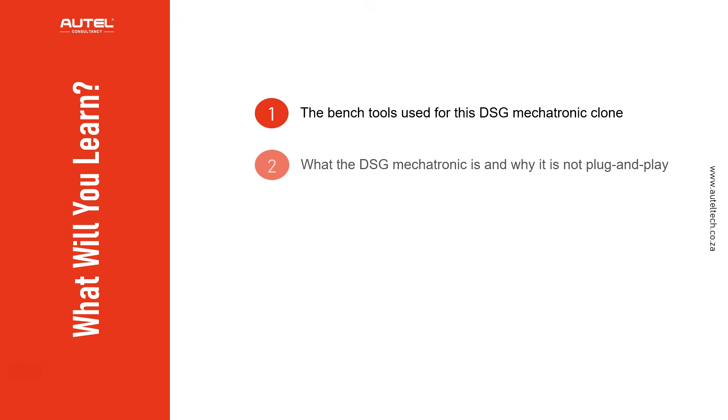Alright, so this is what we're going to be learning today: the bench tool used for this DSG Mechatronic clone procedure, what the DSG Mechatronic is and why it's not a plug and play, how to judge a donor unit when the year or trim is different, how to separate the original source files from the donor backup files, and lastly how to clone a 2012 Volkswagen CC TCM with the Autel IM608 Pro.

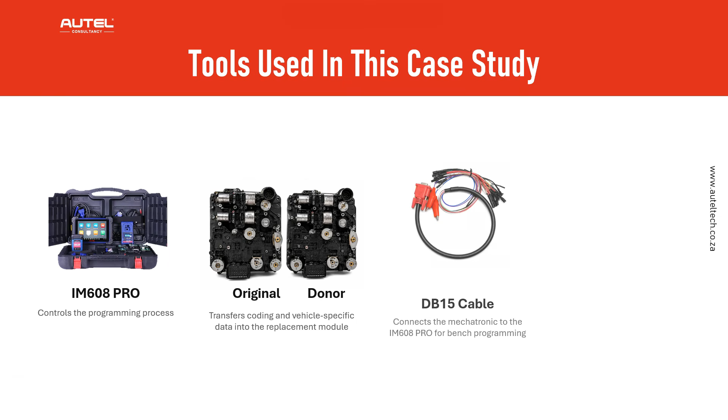The tools used in this case study are the following: the IM608 Pro, the original TCM and the donor TCM, your DB15 cable, and the G-Box 3.

To give you background on this case study, the client reached out to me about a 2012 Volkswagen CC R-Line that needed a new Mechatronic. He said the used Mechatronic came from another 2013 Volkswagen CC, but the vehicle had a different year and trim. So the problem was this could not be treated like a simple part swap.

Even if the Mechatronic physically fits, the module data, the transmission family, the part number, and the software path still have to line up. So before moving forward, the client wanted guidance on whether the used unit could be cloned with the Autel IM608 Pro.

So what is the Mechatronic? The Mechatronic is like the control center inside the transmission. It combines the hydraulic control unit with the electronic transmission control module, and this means it's responsible for clutch control, gear selection, hydraulic pressure, and communication with the vehicle.

So in our case, we're not just swapping a mechanical valve body. We're dealing with a program control unit that has to match the vehicle electronically.

Now, when the client came to me, the first thing I always tell people is when you're dealing with European vehicles, the part numbers need to match. And when he told me it was from a 2013 Volkswagen and we're dealing with a 2012, we might have some headaches down the road.

If you don't know, when you're dealing with European vehicles, anytime you put on used modules, they need to be the same part number. I can't stress that enough. If there is a variation, you're going to have issues. You're going to waste a lot of time on subscriptions and people's money.

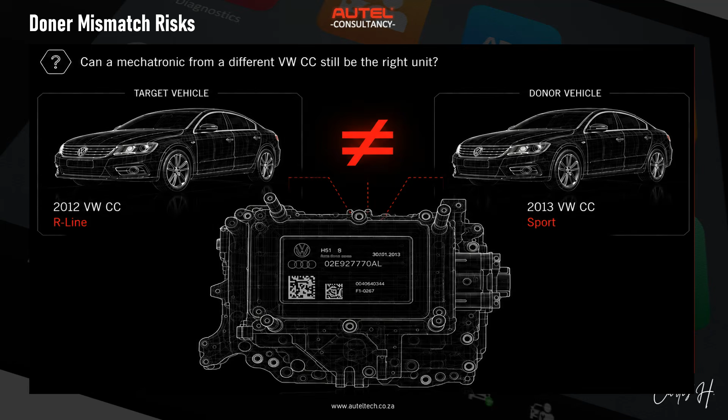So what I did was I said, look, go back and have the owner give me a picture of both Mechatronics, and we can confirm if it's the same. And that's what we did. You can see on the target vehicle, the part number is exactly the same as the donor. So with this, I said, okay, since we have the same part number, it's safe to go to the next step, which is the clone.

And this is going to be the workflow that we're going to be using. Step number one, we're going to take it on the bench. We're going to read the flash, the internal EEPROM, and the external EEPROM. Then we're going to save all of those and label them as original files onto your IM608.

Then we're going to put the donor one on the bench. We're going to back up the donor TCM and do the same sequence: read the flash, the internal EEPROM, the external EEPROM.

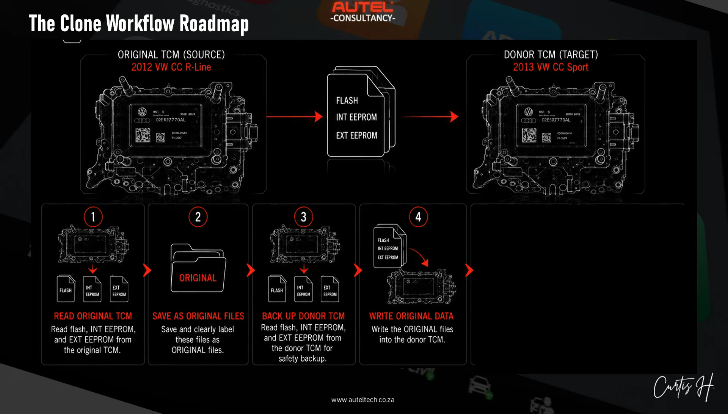And then we're going to write the original files that we saved onto the donor TCM. Then we're going to install it on the vehicle and scan for any error codes or do any necessary adaptations. Okay, so this is the workflow.

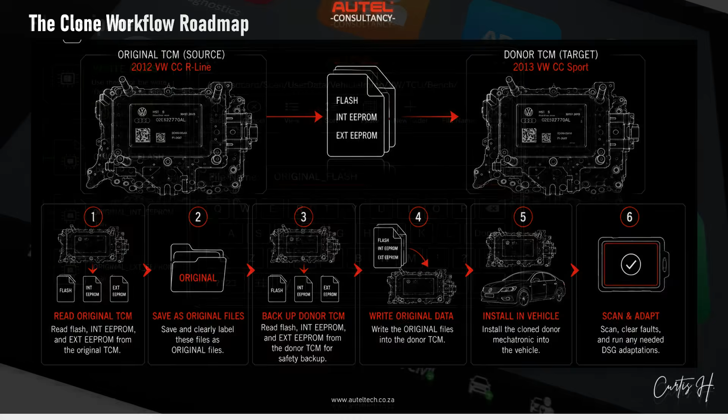One thing that's very important when you're doing these bench programming procedures is to have some sort of file naming convention where you can identify the files, because we don't want you to write to the incorrect file. I'm going to show this to you in the video, but you guys need to create some systematic way to label these things when you're saving these bin files.

Step number one, confirm the TCM and the bench wiring setup. We're on the bench now, and we're going to go ahead and ID the vehicle. Just going to fast forward this up a little bit, you guys. There's a European one.

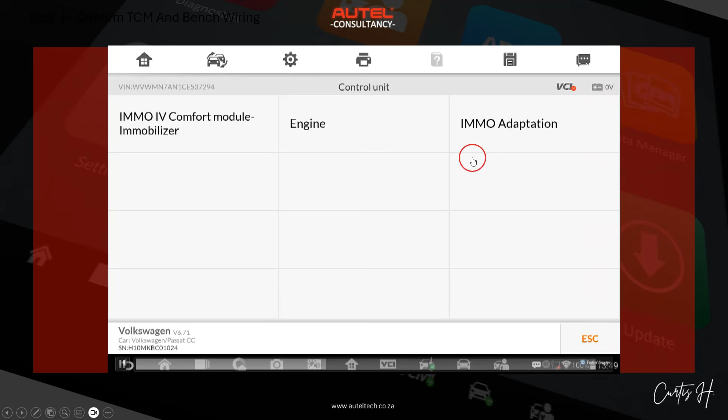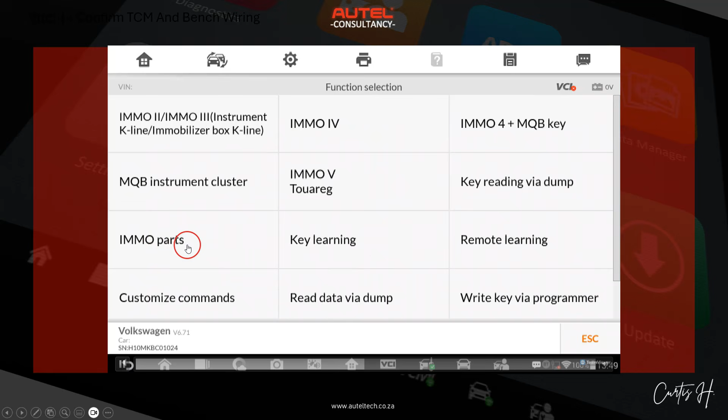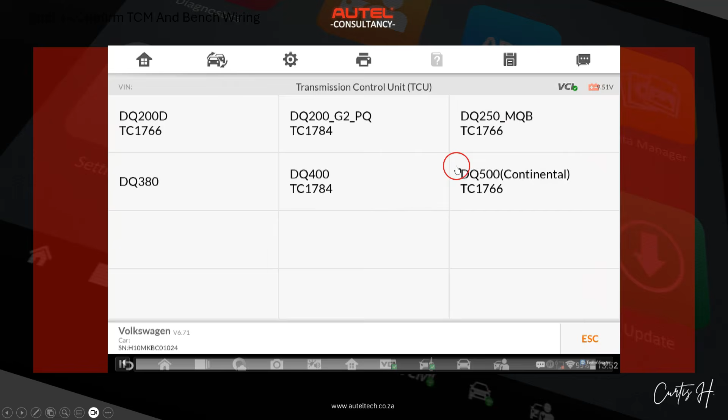Then we're going to go to control unit, and then to IMMO adaptation, if I can recall correctly. Here it's going to revert us back to expert mode, so click expert selection. From here we're going to go to IMMO parts. Once we click that, we're going to locate the transmission control unit on the top right, and then select, in our case, the DQ250. This was on the Mechatronic, so whatever one you're working on, you'll select accordingly.

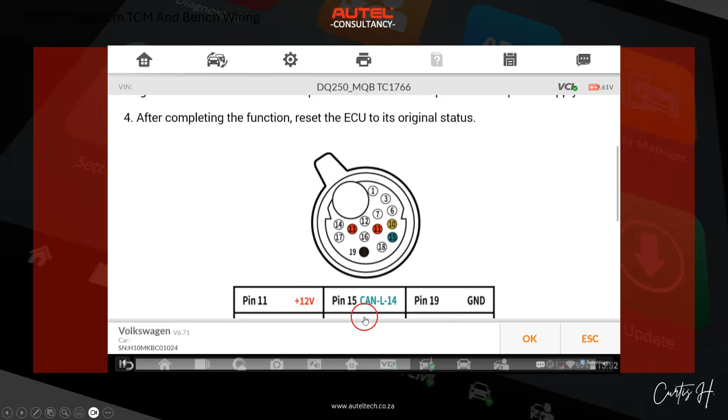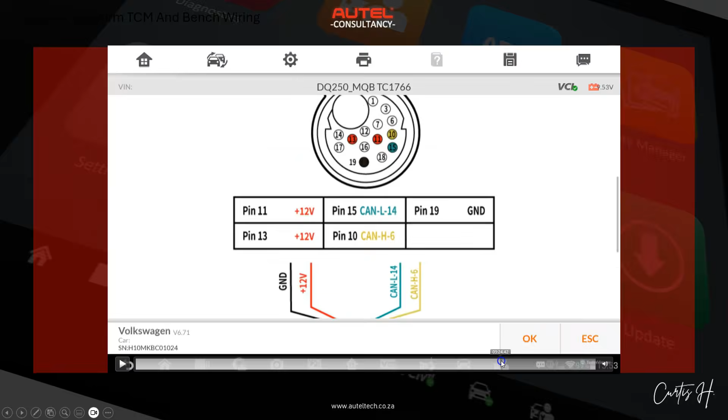Here it's giving us the procedure. What we're going to be using is the DB15 cable, connected to your G-box. We have your power source, and you just look at the diagram—this is what my client was doing at this moment. He was connecting everything up according to the diagram, your ground, your powers, and once that's done we can go on to the next step, which is to read and save the original data.

Once he's connected, we're going to go ahead and click escape, and then you can see here we're going to read the flash data. That's the first step. It's going to take a moment to communicate, but once it communicates you're going to start to see the progress bar of reading the flash data. We're going to let this go all the way up to 100%.

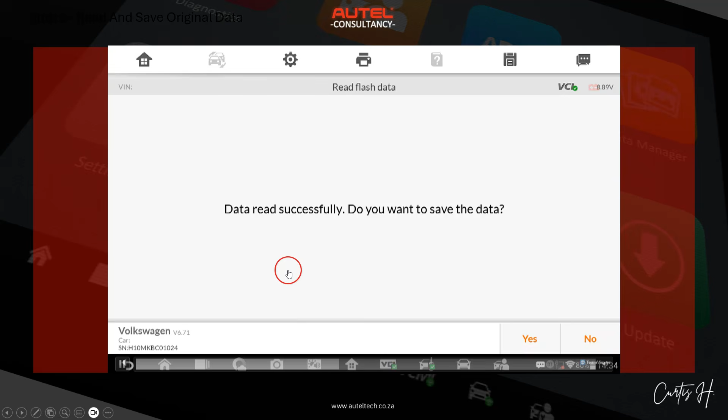It's going to ask us, do you want to save the data? We're going to go ahead and click yes. What I'm doing here is deleting the default label that the Autel made, and relabeling it with my naming convention. Once I paste it, I have 'original,' and at the end it says 'flash.' I'm going to go ahead and save that to the system, and move to the next sequence, which is the middle one right here, read internal EEPROM.

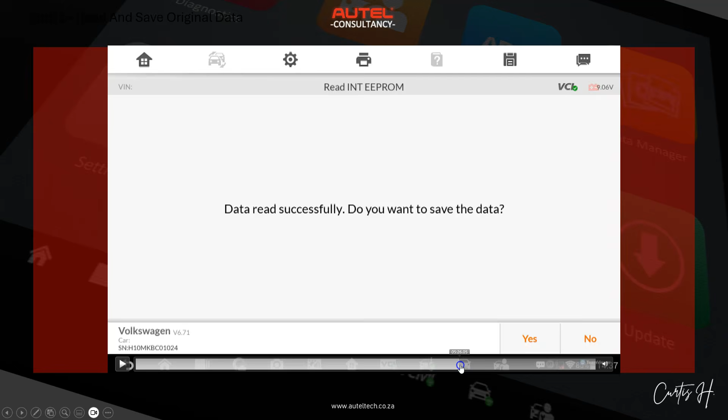Once I read the internal EEPROM, we're going to keep following the same process—you're going to get the progress bar, going all the way to 100%. Do you want to save it? We're going to go ahead and click yes, and then paste the naming convention, and click OK.

And we're going to do the last one, read external EEPROM, and then you can get the progress bar. What you guys can see on the upper right, I have the battery illuminating.

There was a problem with this customer's VCI. He's known about it, but that's all he had at the time. You always want to make sure you have good voltage while you're on the bench, but that's why this thing's going off like that—there was a power issue with his VCI.

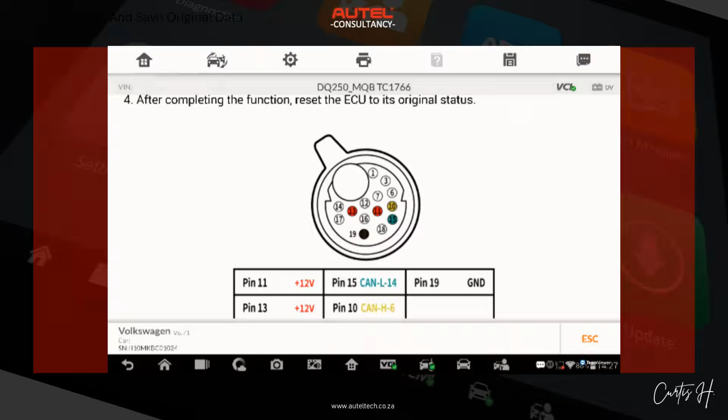Back to the thing—we're going to go ahead and click save, and then I'm going to delete that, paste it again, and you're going to see I have it labeled as original. From here we're going to go on to the next procedure, which is to back up the donor TCM. So now we have the donor on the bench, and we're going to back it up. We're going to connect it accordingly.

Once that's connected, we're going to go ahead and read the flash. Once that gets to 100%, we're going to save it. Click yes. This one I'm going to label as the used flash, and I'm going to click save.

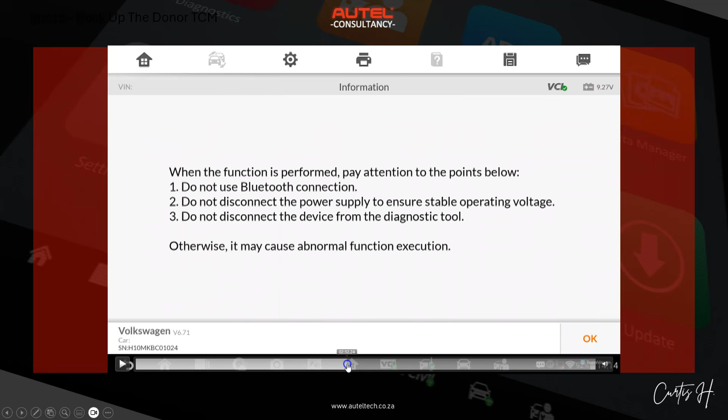I'm going to go right in the middle, read internal EEPROM. Follow the prompts, make sure the connection's good, and then we're going to get the progress bar. This one took some time. We're going to go ahead and click yes.

I'm going to delete it again, paste my naming convention, then click save, and we're going to do the last one: read external EEPROM.

I don't know why my video is going like this. I think that was the external EEPROM. Yeah, that was external EEPROM. My bad, I think the video was skipped, but you guys get the point - you're going to go read the flash, read the internal, and read the external.

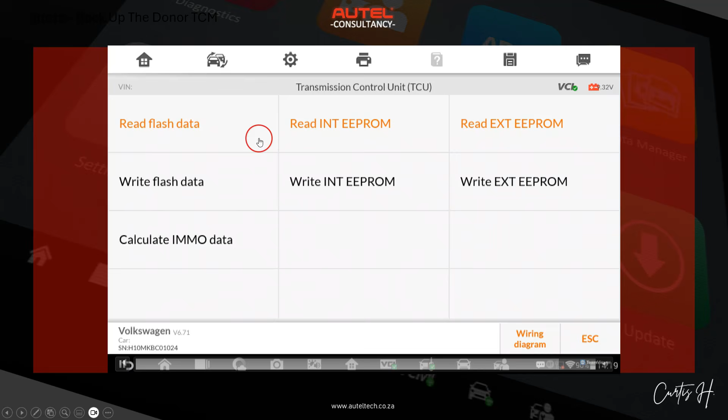Now we're going to go on to the next step, which is write original data to the donor. So we're going to go click write flash data.

Then you're going to see here all the files are labeled. You have the EEPROM, you have the flash, the internal, the external. I'm going to go click the flash, and I'm going to select OK.

We're going to go ahead and let it do its magic. We're going to get the progress bar. There we go, okay, so it was written successfully. We're going to click OK.

We're going to do the same procedure for, I think it was the internal. You can see it there. I'm going to go ahead and click OK, and we'll let it do its magic again.

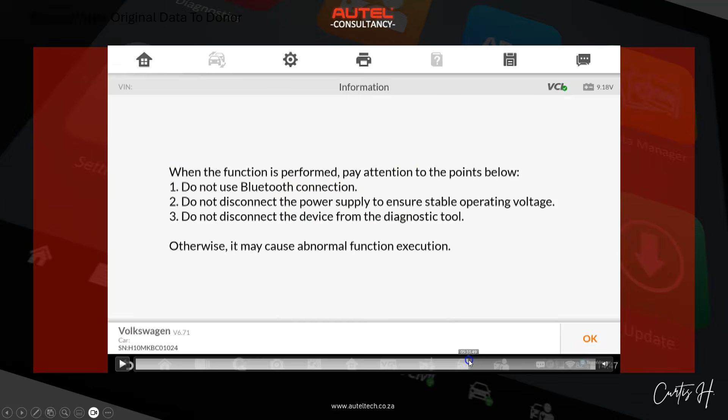That's been written okay, and we're going to do the last one, which is the write external EEPROM. It's this file up there. We're going to click OK, then let it do its thing, and we'll get the confirmation, and we're going to click OK.

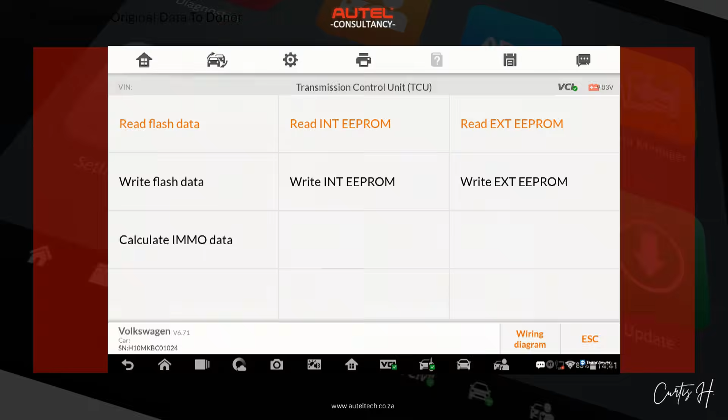Okay, so now that we've cloned it, we're going to go to the vehicle, and we're going to scan and verify any error codes. This is the moment of truth.

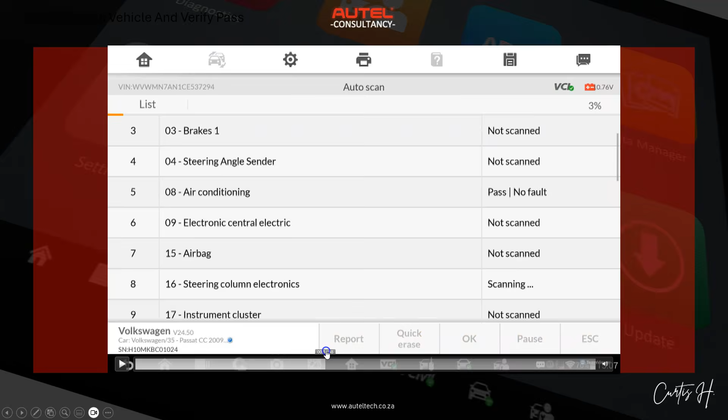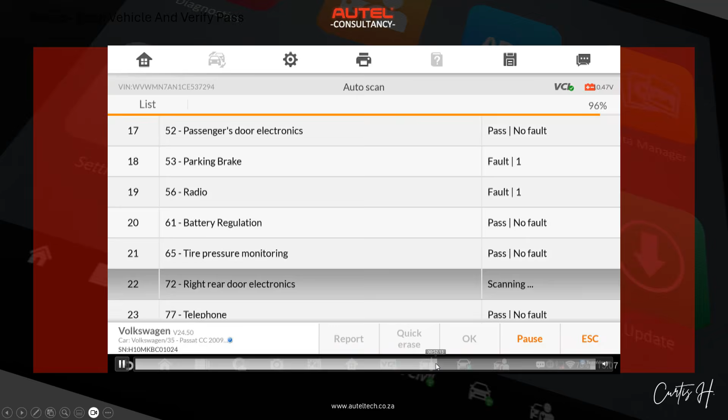We're going to go ahead and ID the vehicle. It's been ID'd, and then we're going to go ahead and run a diagnostics auto scan. What I'm looking for here in this initial scan is fault codes in the TCM and in the immobilizer system. Luckily all the data was transferred and there's no fault codes.

And I had the customer start the vehicle and the car started just fine. So as far as our concern, our job is done.

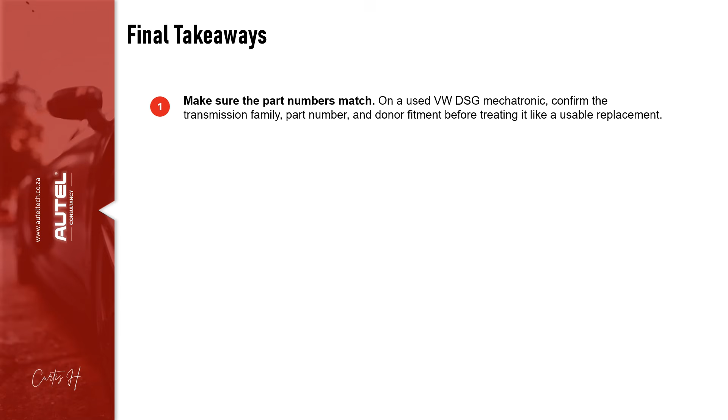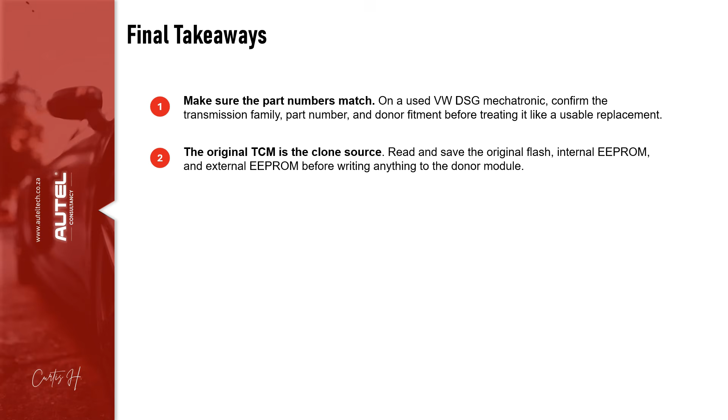So final takeaways. First thing, make sure the part numbers match. On used Volkswagen Mechatronic, confirm the transmission family part number and donor fitment before treating it like it's a usable replacement. Very important. Number two, the original TCM is the clone source, so you want to read and save the original file - the flash, the internal, the external - before writing anything to the donor module. The donor TCM still gets backed up first, so that gives you a recovery file before the used module is overwritten with the vehicle specific original data.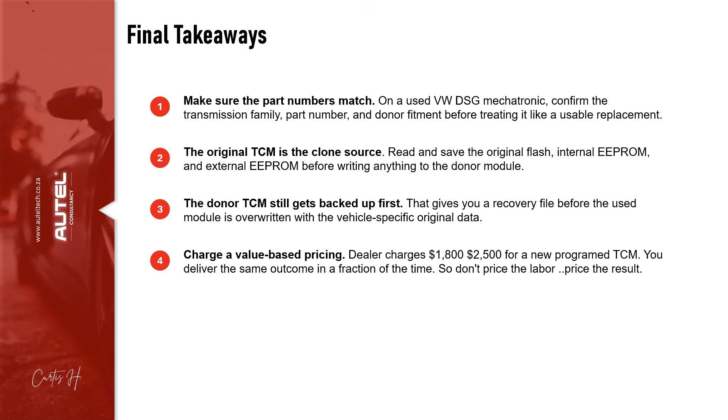And then next is charge value-based pricing. The dealer charges for this whole procedure $1,800 to $2,500 for a new program TCM. You deliver the same outcome in a fraction of the time, so don't price the labor, price the result. If you're going to be saving your clients that much money, don't be afraid to charge for it. If you charge $400, $300, even $500, you're still adding a lot of value to the customer. I'm not saying rip them off, but this procedure is one of those things where it has a high perceived value. So with that, you guys, I hope you enjoyed it.